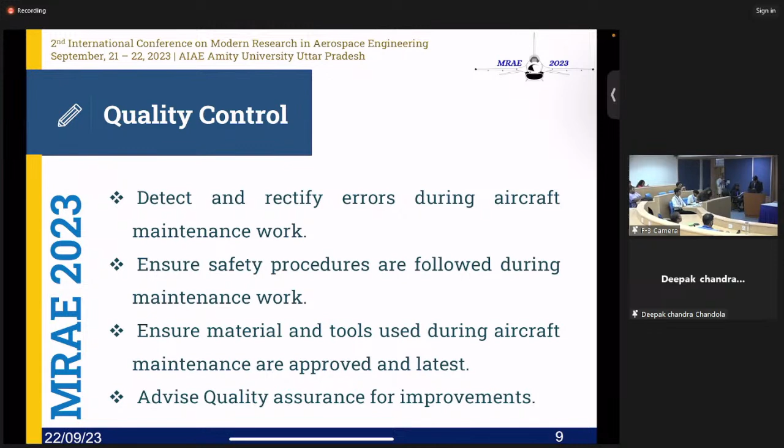Then the quality assurance team ensures that the quality management system framework is in place. It is integrated with the safety management system, and they assess and issue authorization to aircraft maintenance personnel to perform maintenance on aircraft. So all the people working on the aircraft, performing maintenance, are not random people. They are properly assessed, including after recruitment, and evaluated by the quality assurance team to issue authorization.

Once they get the authorization, only then are they allowed to work on aircraft. In addition to all three, the fourth important vital function which quality assurance performs is doing audits. Auditing happens in two parts, announced and unannounced.

This research paper uses a research methodology which follows a stepwise approach, starting with the problem statement, followed by the literature review. Based on the literature review outcome, a survey is designed. Then the survey is distributed among aircraft maintenance professionals within the airline industry in the Asian region, and then data collection is performed followed by data analysis.

The statistics of the research questionnaire: a total of 9 questions were included in this study, and the questionnaire was distributed among 5,000 aircraft maintenance professionals employed by airlines within the Asian region. The total response received was 4651, making it a response rate of 93.02%.

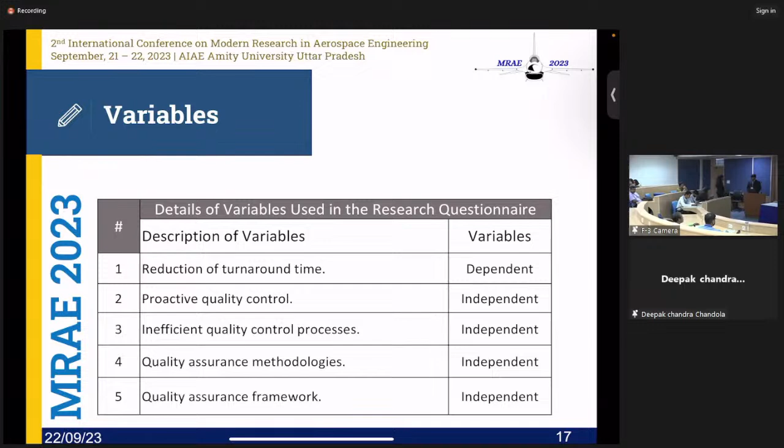In this study, we have used many variables. There is one dependent and 4 independent variables. The dependent variable is reduction of turnaround time, and the independent variables are proactiveness of quality control, inefficient quality control processes, quality assurance methodology, and quality assurance framework. So we have taken 2 questions from quality control specific, 2 questions from quality assurance, and 1 dependent variable.

Based on the regression statistics, the R square value is 0.6252 and adjusted R square is 0.6249. By seeing the adjusted R square, it shows that 62.49% of variation in the dependent variable can be explained by these predictors.

The ANOVA summary of my regression model suggests that the significance value is less than 0.01, which is highly significant, with an F value of 1937.58.

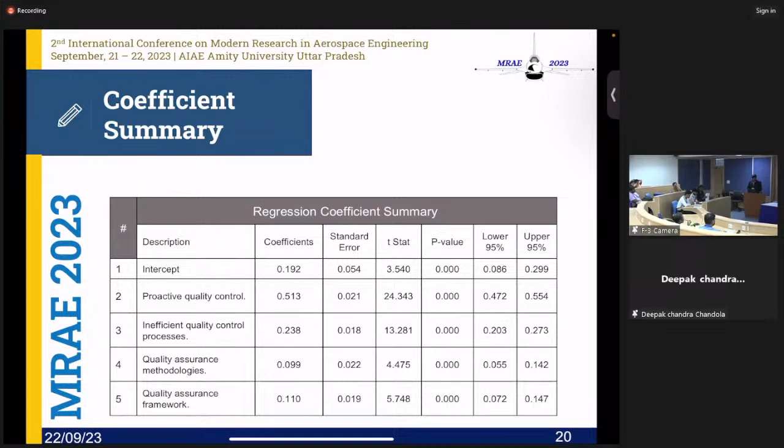Based on the regression coefficient summary, we managed to derive an equational model. Here is the equation model: Y equals 0.513x1 plus 0.238x2 plus 0.099x3 plus 0.110x4, plus the interception value.

So here x1 indicates the influence of proactive quality control in diminishing rework and turnaround time duration. X2 indicates the importance of addressing inefficient quality control processes for enhancement, and X3 indicates the value of quality assurance methodology. X4 indicates the role of quality assurance framework.

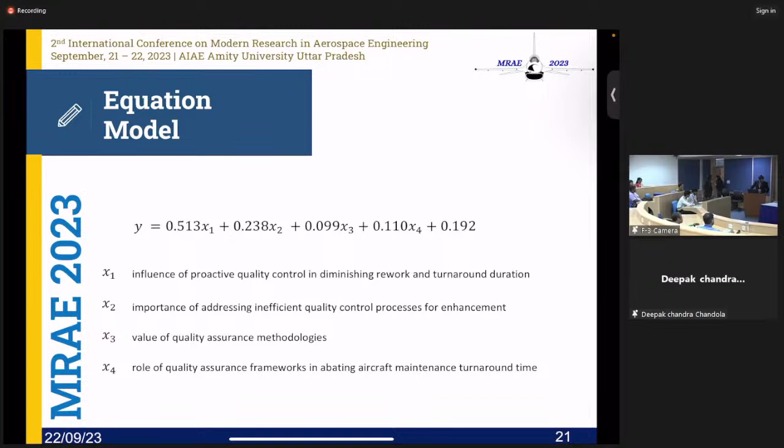So by seeing the equation, we can see that the coefficients attached with X1, X2, and X4 are influencing the most.

Based on the outcome of this research study, these are the 4 outcomes: organizations need to focus on proactive quality control, they need to redesign their quality control process, they need to enhance the quality assurance methodology, and additionally they need to do reassessment of their quality assurance framework.

So here is the conclusion. It follows the outcome that quality control and quality assurance play a crucial role in reducing the aircraft maintenance turnaround time. For future scope of work, future researchers can collaborate more with industry expert airlines, and they can suggest a quality assurance framework.

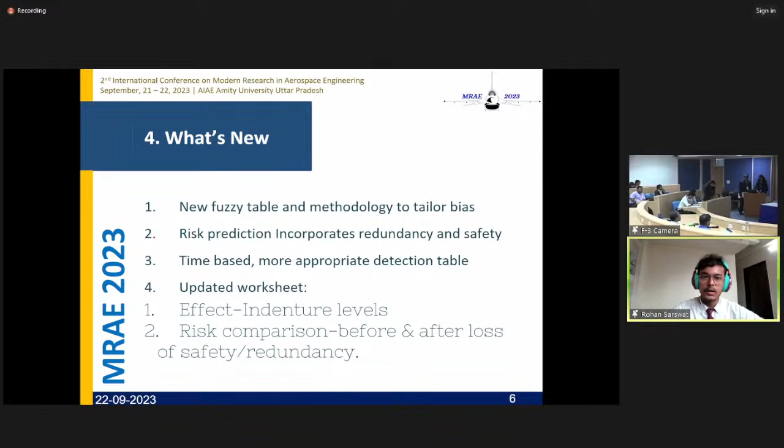And this is worksheet style documentation, fuzzy risk calculation. It refers to the fact that we can actually tailor the fuzzy tables according to the need of the enterprise. And risk values can also be compared, and accordingly the corrective actions can also be suggested.

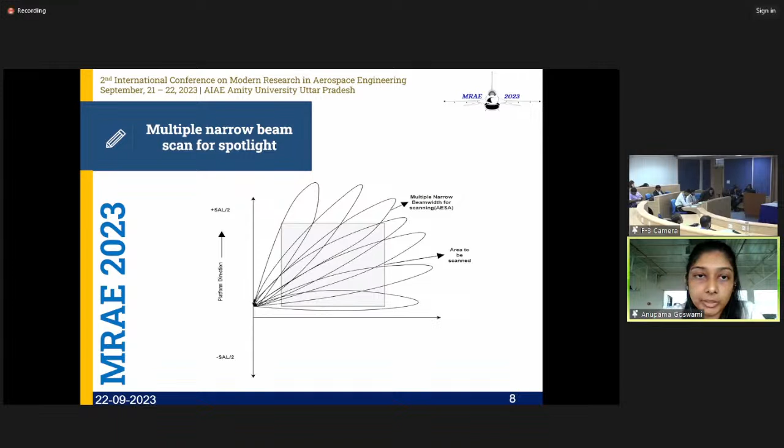What we are using here is the LFM signal, the linear frequency modulation, for improving the range. A drawback that came in this is that there was a blind range that I haven't yet overcome, though we can overcome it with different methods. In my process there are two drawbacks: one is the blind range which came when I was using the up-chirp signal, and second is the RAM needed in the system, which needs more than 16 GB.

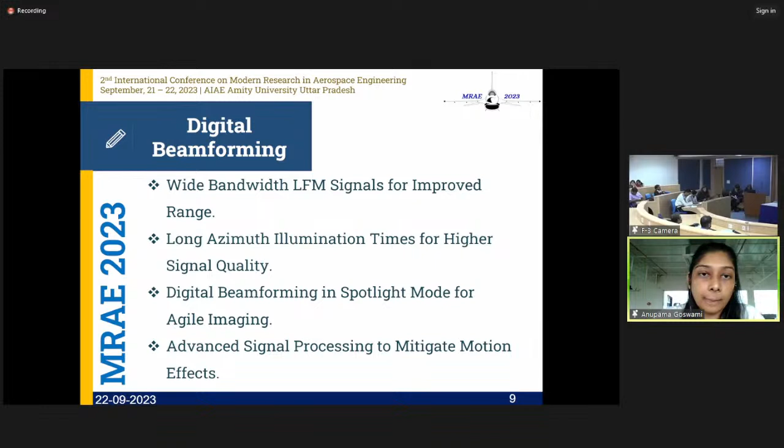We can use it in airborne radars, and the speed I have used is 230 kilometers per hour. We can actually go with Mach speed also if it's possible. The up-chirp signals we have used are actually very good for ECM and ECCM.

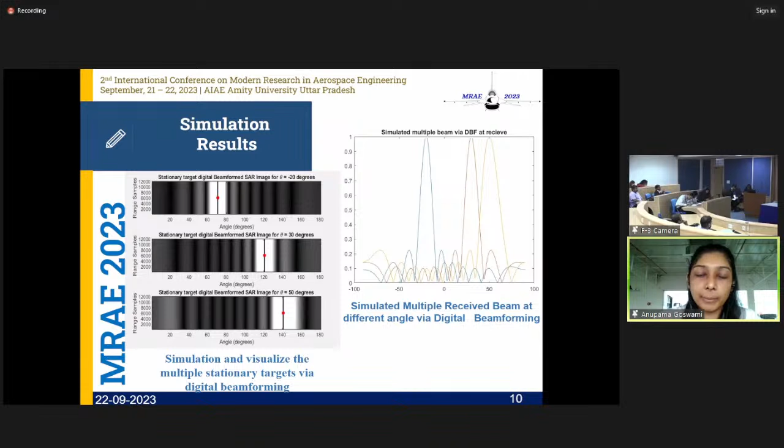Also, for image processing, match filtering and correlation are used. We can use multiple algorithms here, and can also go for space time adaptive processing, PFA, back projection and other techniques. The conclusion is that there is effective use of wideband frequencies, that is linear frequency modulation signals, which can be used for the frequency band as per the need.

The testing shown was done for the X band, that is 10 gigahertz, and also the KU band, that is 14 gigahertz, where we got a very clear image. We also did testing for the Ka band, but for that band the image was not clearer, so we have to change the parameters and the matrix accordingly.

We can also use platform motion compensation, that is roll, pitch, yaw, and work on it. We can also use the adaptive Kalman filter, or any adaptive algorithm or adaptive digital beamforming, so that we can track the target we want to track.

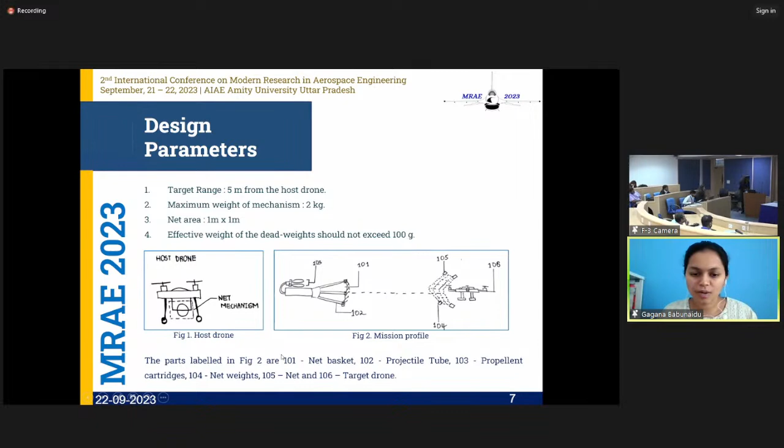The first task was to come up with a propulsion mechanism which can propel the net. So the team looked into electromagnetic propulsion, springs, jumper mechanisms, and gas propulsion.

The major limitation of the electromagnetic propulsion was the weight of the magnets. When we investigated the spring mechanism, the springs could store tension and launch the dead weights out of the basket.

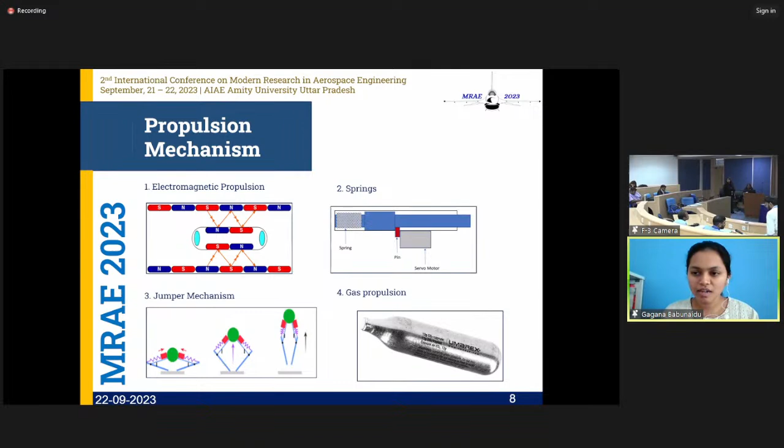The problem was the synchronization of all four dead weights at the same time, and we were not able to come up with a solution to estimate how much energy was stored in each of these springs. So further, we looked into the jumper mechanism, and gas propulsion focused on compressed air and carbon dioxide, which is presented in the following slides.

To initially estimate how much range we could achieve, we ran a MATLAB code using our initial design parameters, and we saw that the mechanism could move up to 11.9 meters.

We started with the jumper mechanism for propulsion. A jumper mechanism consists of four unidirectional carbon fiber strips attached to a barrel using two hinges, and these two hinges are connected by a string to a servo motor.

Once the servo arm is toggled, the tension in the unidirectional carbon fiber strips is released and will propel the dead weights out. This dead weight, in turn connected to the net, will propel it. So the idea was to have four of these mechanisms to propel the net.

We performed ACP analysis on ANSYS to compare commercially available unidirectional carbon fiber rods and test the reaction force provided by them. We observed that a reaction force of 11.9 Newtons was being provided from one carbon strip itself.

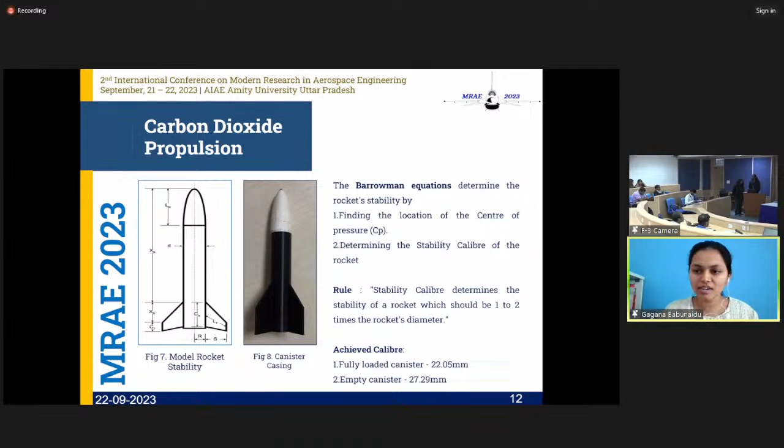Initial tests were run using a normal PVC pipe, where we attached the canister into the casing and fired it using a piercing nail. But the major challenge was that though the canister was stabilized by the casing, it was not maintaining a straight path—it was wobbling inside the pipe itself. As a result, we built a trigger mechanism to restrict the movement of the casing. But later, the team saw icing issues from the carbon dioxide after it was stored for a month.

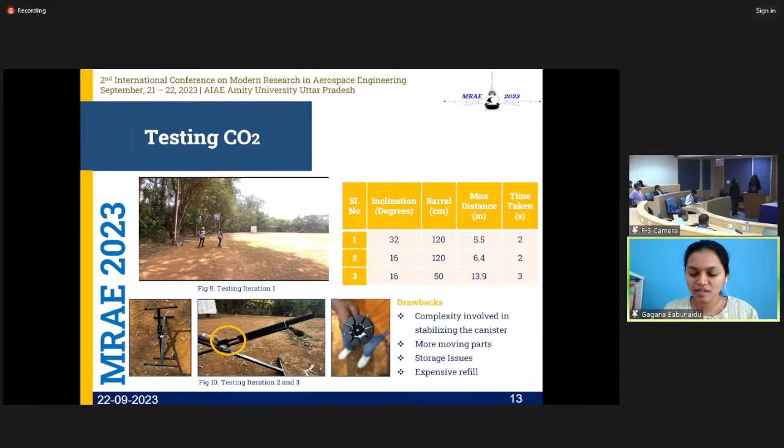We started to look at different mechanisms which would offer us better functionality. So then we looked into compressed air propulsion, where we have a tank in which we use the gas, where the gas was pumped into the tank, and we used a normal ball valve to circulate pressure in all four pipes.

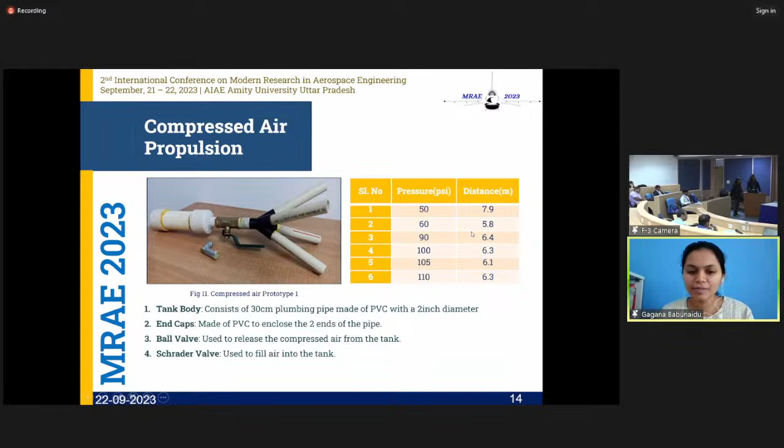Dead weights were attached to the four different pipes, and a net was placed in the middle. This was a basic prototype to test the functionality of the compressed air propulsion, and we were able to achieve a range of 6 meters roughly. Here are a few clips from our testing phase.

From the test, we were confident that we would be able to achieve the desired range of 5 meters, and further, the different tests proved that the compressed air propulsion was reliable for this countering drone system.

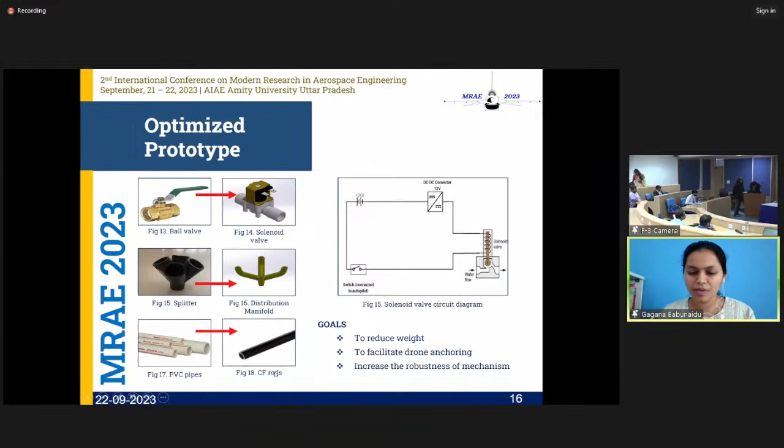As a result, we moved ahead and optimized the mechanism. Instead of a ball valve, which was heavy, we used a solenoid valve, and instead of a splitter to attach the PVC pipes, we designed a distribution manifold which was later 3D printed. And instead of PVC pipes, we used carbon fiber rods. This was the final system which was built and tested.

So these are the final testing videos. From this project, we were able to design a mechanism which will launch up to 4.5 meters rather than the intended 5 meter range. The major issues and limitations were the bends in this mechanism, which caused us to lose pressure and reduce the range.

Further, this project can be analyzed to come up with techniques to reduce the pressure loss and increase the range, and also make it better, like more compact in size, so that we can reduce its weight and fit it into a drone. Thank you.

Can we start the question and answer session? Madam. Yes, sir. Yeah, I think I have one or two small queries.

You tried both PVC and carbon fiber rods, you said, right? Yes, sir. So what are the pros and cons of one over the other? PVC has a bigger thickness, and the pipe itself holds a lot of pressure, and that was the major advantage for PVC, whereas carbon fiber rods were thin. The disadvantage was the PVC pipes were heavy, but the carbon fiber rods were less in weight.